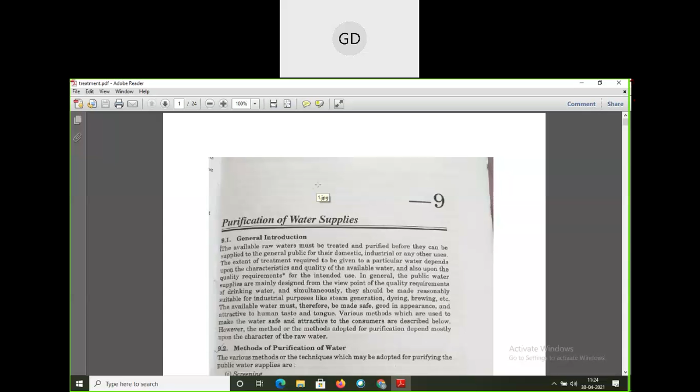There are different methods by which you can purify or treat the raw water. First is your screening, then comes plain sedimentation, then sedimentation aided with coagulation, then filtration, then disinfection, then aeration, then softening, and some other miscellaneous treatments are also there, like fluoridation, recarbonation, liming, desalination, etc.

So these are the methods. In short, if you would like to explain to somebody, these are the steps or methods described. So what is your screening part?

In the raw water, in the rivers, lakes, ponds, there are big and visible objects - plastics, branches of trees, sticks, dead fish, animals - they are floating. The work of the screens is to remove these floating objects, whatever is floating there, from the raw water of surface sources. That work is done by your screening.

After the big and visible objects like trees, sticks, and plastics are removed, what about the coarser materials? The coarser suspended materials cannot be removed by screening, so they are allowed to settle down in a settling or sedimentation tank or sedimentation basin. This whole process of settling down the water in a sedimentation basin is known as plain sedimentation. In that way, you can remove the coarser suspended materials available in the raw water.

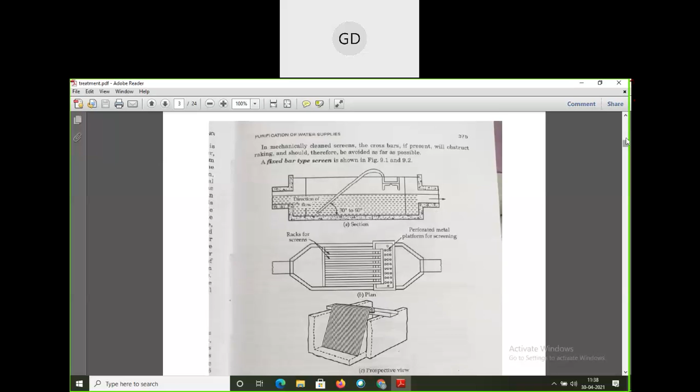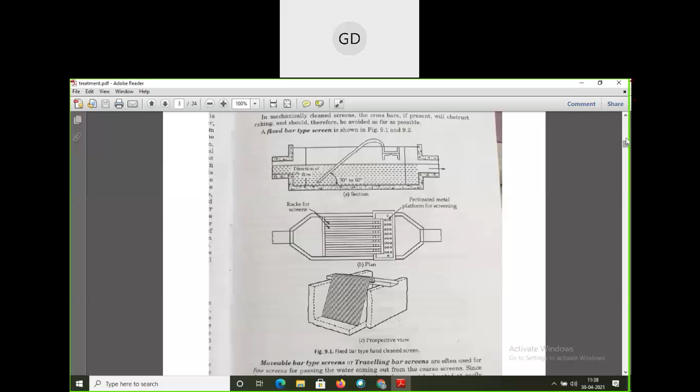So this is the plan of a screen. You can see this is the perspective view, and this is the section of a bar type hand cleaned screen. There is a movable screen also. A movable screen is very good because you can pull out this screen, clean it, and put it back in the machine. So this is also a good movable type of screen. You can see some of the pictures of screens.

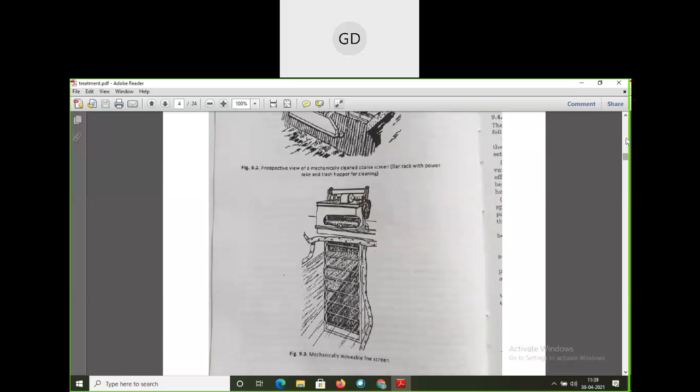So now the next step is plain sedimentation. After you have excluded the large size particles with the help of screening, the fine suspended solids remain. These suspended impurities have a specific gravity greater than that of water, and they remain in the water.

So in the sedimentation process, these impurities are allowed to settle down under the action of gravity. You keep the water in a still position for some hours, and the suspended impurities will tend to settle down under the action of gravity. Next, there is one term known as the detention period. The detention period is whatever time you are keeping the water in the still position, or in the sedimentation tank.

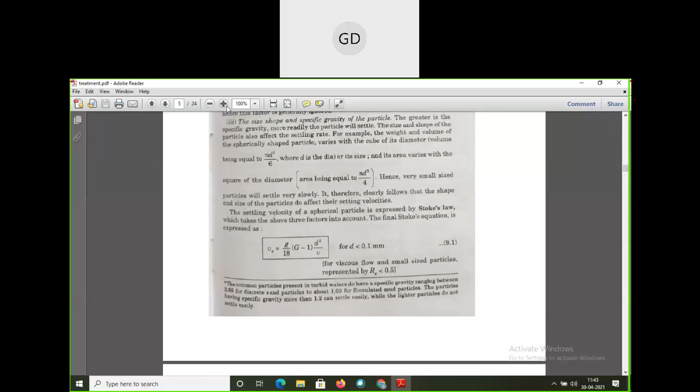Then comes this formula, known as the final Stokes equation. This formula is used only when the diameter of the particle is less than 0.1 millimeter. It is for viscous flow and for small sized particles, when your Reynolds number is less than 0.5, only then you will use this equation.

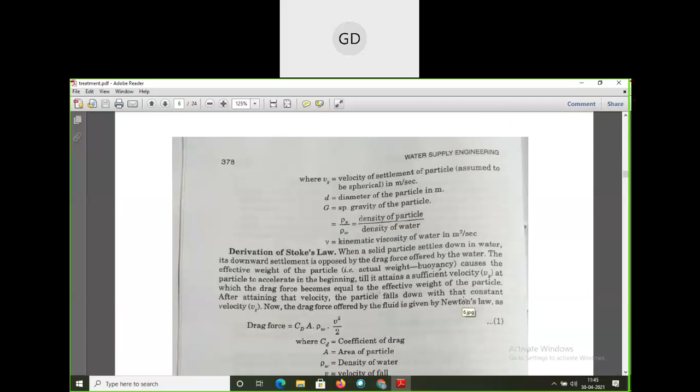Here Vs is your velocity of settlement. d is the diameter of the particle in meter. Capital G is the specific gravity of the particle. Small g is the acceleration due to gravity. Nu is the kinematic viscosity of water. So all these things are given. If some numerical is given, you will be able to use this equation when the diameter of the particle is less than 0.1 mm.

After that come two more equations. One is Newton's equation. You can see this equation. This equation is used when the settling particles are larger than 1.0 mm. These are all settling velocity equations. So we have got the equation when the diameter is less than 0.1 mm, and this Newton's equation is for when the diameter is greater than 1 mm.

Another one is known as the Hazen equation. It is used when the particle lies between 0.1 mm and 1 mm. So if it is between 0.1 and 1, you use the Hazen equation, and if it is greater than 1 mm, you use Newton's equation. So three equations you have got: Stokes equation, Newton's equation, and Hazen equation.

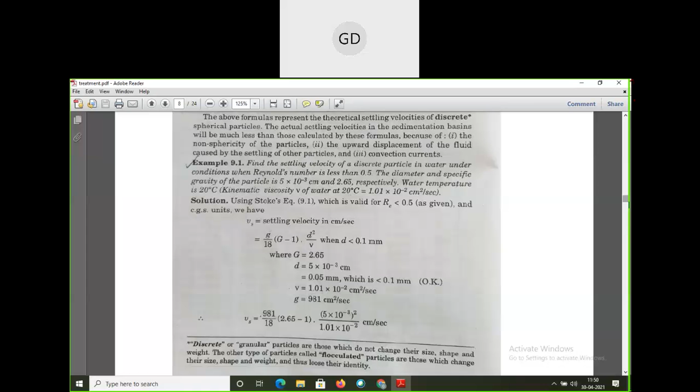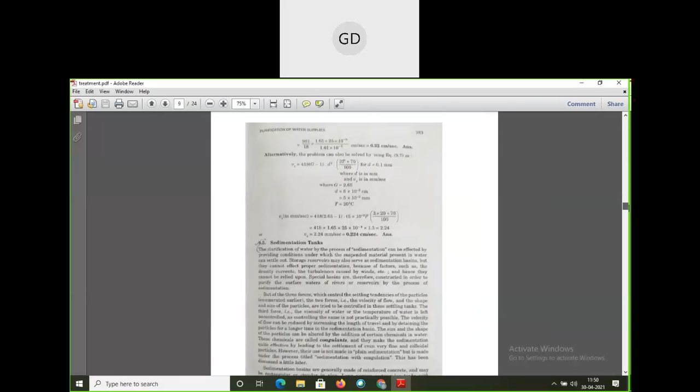Okay, then today up to here only we will do. In the next class, I will be going to the sedimentation tank part, the next method. I hope today's class is clear to all of you.